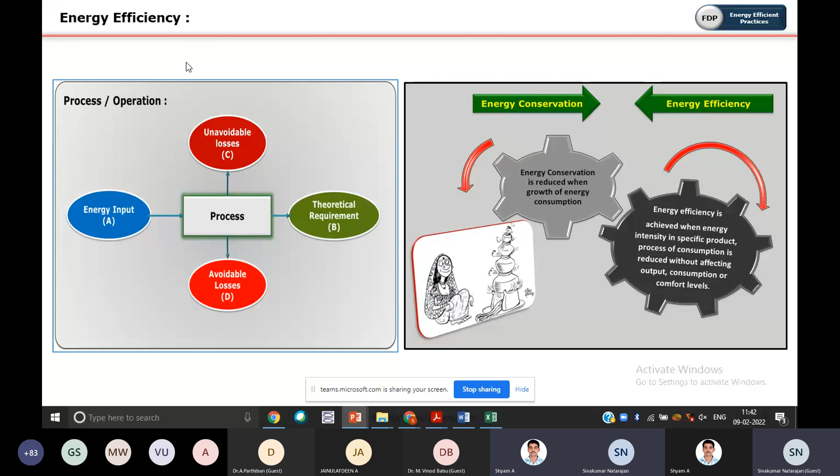So that is called energy efficiency. I hope we can move on to the next. And also one more thing, these compressors. I hope you are aware of the basics about the compressors, but I'm not going into details on the basics. Without knowing the basics of the components, not only compressors, I think you are going through many useful, productive sessions these 2 days.

Any basic components of any machineries, equipment, system, process or assembly line. Without knowing the component, you cannot measure. If you cannot measure, you cannot save the energy. So energy efficiency is possible only if you know the requirement of the process. What is the outcome of the process? The product metrics of the process, the characteristics of the process.

Okay, when we come to air compressors, broadly they're divided into dynamic type and positive displacement type. And the applications we use compressors for: plant air applications, clean air, cleaning applications, dry air, instrumentation, breathing in medicals, and process. Many process industries are using air applications. So for all these types of applications, which compressor we need to choose? That is the major critical one. That is a significant part of energy efficiency and energy efficient operation.

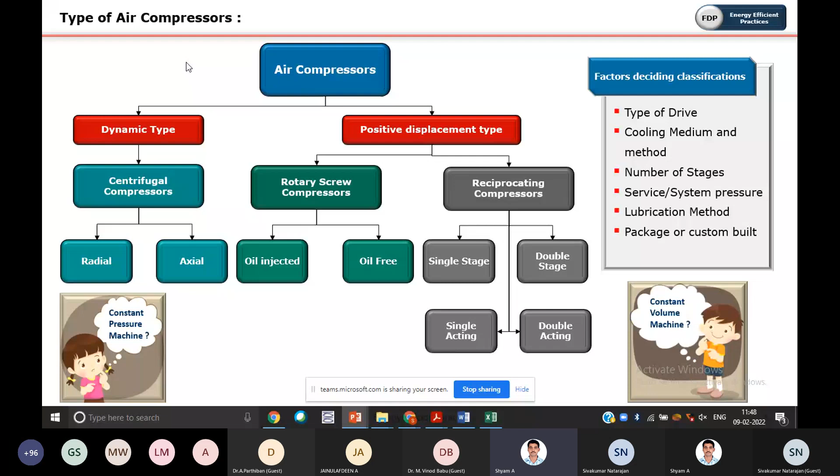In a compressed air system, there are two parts: one is the supply side and another is the demand side. We should not look only into the compressor side, because compressor is a main part, but that is not the only deciding factor for the energy efficient operation of a compressed air system. Compressor is just one element in the compressed air system.

Apart from this, on the supply side we have the compressor, filters, dryers, and receivers. On the demand side, that means in the assembly line, machine shop, substation, power station, or process equipment side, there are also some components.

Now, the important parameters in air quality. Why do we give so much importance to compressed air? Many people think compressed air is free because compressors are always kept aside in industries like power houses. So why do we need energy efficient compressors?

The important parameters in air quality are: the dew point, moisture should not be there, and oil content should not be there. Temperature should be optimum or low, and the air should not contain particulate matter. For this, there are some filters, even a pre-filter on the suction side, which is a very important part but often neglected. Many people neglect that area.

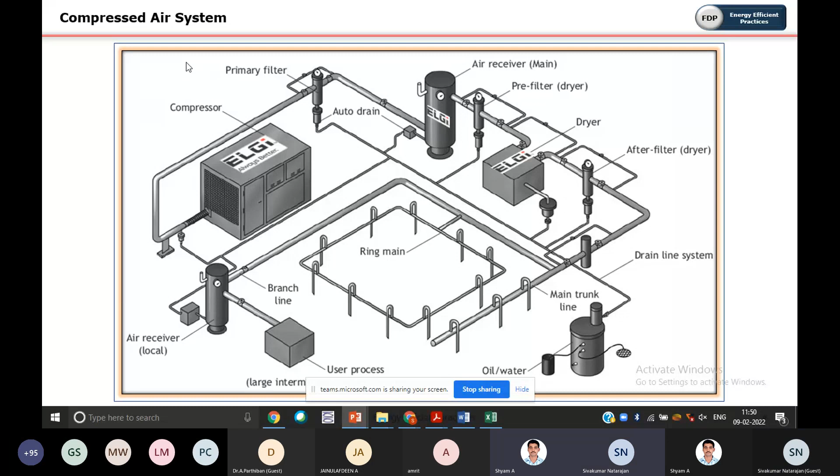This primary filter, pre-filter, and after-filter are all part of the supply side. Coming to the supply side: there is a compressor, then a moisture separator, a vertical or horizontal receiver, particulate filter, dryer, fine filter, and carbon filter. So we will get pure air.

The moisture separator separates the liquid water and oil from the air stream that needs to be removed. For this, the moisture separator is used.

Sometimes we know that water vapor cannot be filtered out of air; water in a vapor state can only be removed by a dryer. If it is liquid, then it can be removed by the moisture separator. So we need to understand water vapor cannot be removed by the moisture separator, but water in liquid form can be removed by it.

Coming to the receiver part, the receiver is always an important factor because it needs to comply with ASME standards, the American Society of Mechanical Engineers, which has given standards for pressure vessels like air receivers. There are two receiver types.

One is the wet type, because we connect it before the dryer, called the wet receiver, and after the dryer if we connect the receiver, that is called the dry receiver. This is used for intermittent load applications.

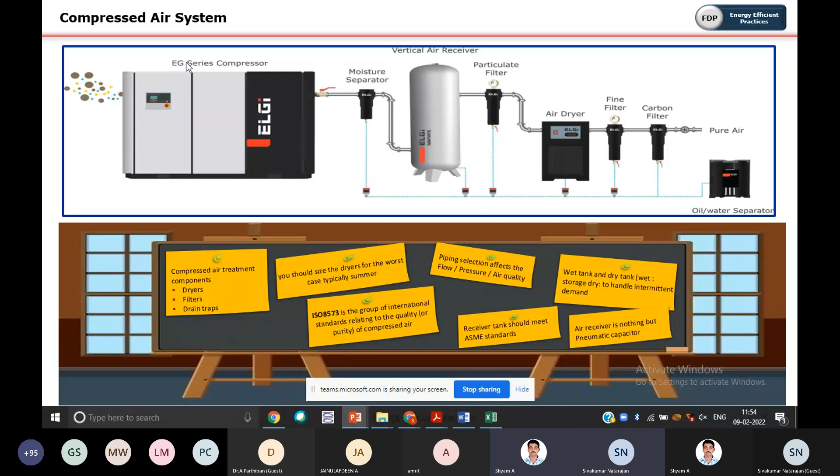So coming back to selection of compressors. We need to select the compressors before energy efficiency, because it starts from the selection of compressor, each and every component selection. Energy efficiency will not be addressed at the end of the commissioning. It will start from the planning part, right?

Also, which type of compressor - dynamic type or positive displacement type, reciprocating, rotary, or centrifugal - we've already discussed this. Beyond 12,000, from a high demand area, we don't have any other option, so we go for centrifugal. Only that will be efficient for effective operation of the plant as well as for efficiency.

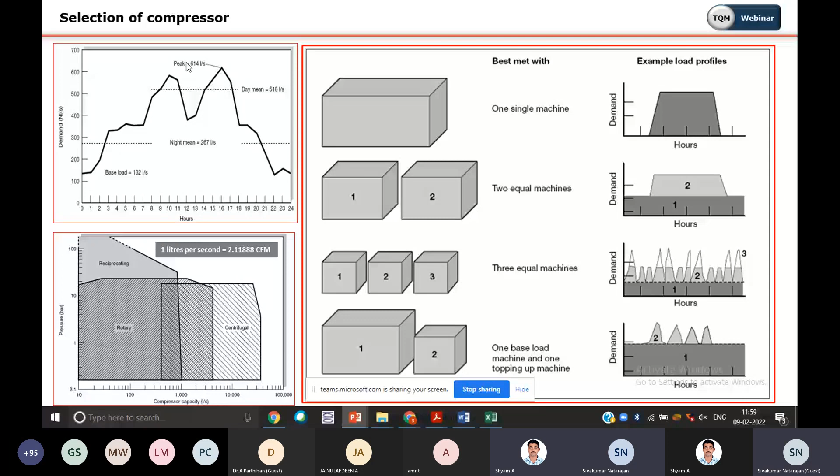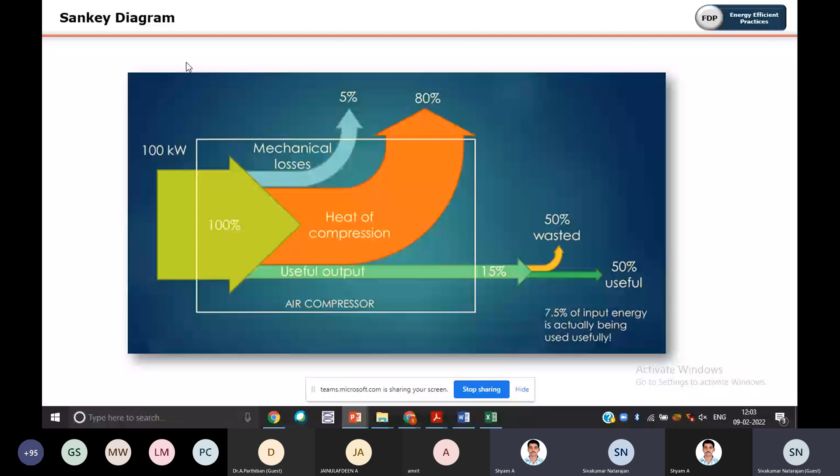Coming to life cycle cost, we need to consider the life cycle cost of equipment and machineries. Normally compressors are the costliest asset in any organization. The energy cost is hidden because every month the EB bill goes to finance, and compressor energy is one element of that cost. It will remain hidden if not addressed properly. The initial cost is only 10%, while energy cost and maintenance cost combined make up 90%.

So we need to address both. If you do proper maintenance, energy efficiency will also improve. In maintenance cost, it's inevitable that we spend on consumables - we definitely need to do that. Unless we spend properly on maintenance, energy cost will be higher and we will not achieve energy efficiency. Maintenance cost is a must, but with good maintenance practices we can avoid downtime, unforeseen failures, and major breakdowns.

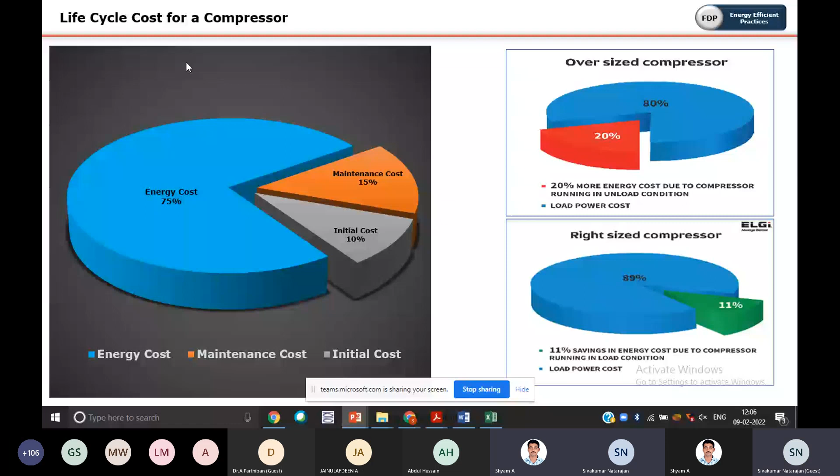Okay, we want to achieve energy efficient compressors and also an efficient compressed air system. If we address only the compressor elements and the compressor, that will not solve our purpose. The demand side is what we need to address. That is very, very important, because we get only 50% of compressed air for manufacturing. Another 50% goes to waste, ineffective.

Air leakage is the most neglected part in industries, in plants. When you are walking through the plant, do you observe air leakages? Even if you observe them, what will you do? Sometimes that air sound becomes familiar. We get familiar with air sounds. Only if the sound is huge, enormous, do we go there for safety purposes and see what is to be done. Otherwise, small air leakages go unnoticed, no man's land.

That needs to be addressed in a proper way, because these are no cost, low hanging fruit opportunities. You simply do some corrections: cleaning, lubrication, inspection, and tightening. That's all. And FRLs, once you fit them, once you commission them, no one bothers sometimes. But you also have to do air leakage management. You see, a minimum of 25% is there. In some industries, some plants, even more than that.

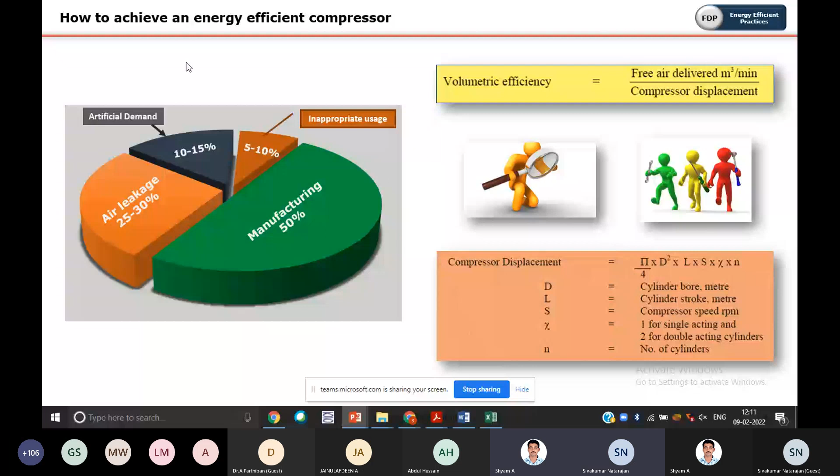Okay, we have opportunities. How to address energy efficiency, right? Before knowing the energy efficiency opportunities, we would like to know what efficiency in the compressor is. These efficiencies are termed isothermal efficiency and many other terms. One of them is volumetric efficiency. Volumetric efficiency is the ratio between free air delivered and compressor displacement.

Here you can see compressor displacement, and we will see free air delivered. What is that? It is nothing but the discharge air we get at the end of the compressor before it goes to the shop floor. For compressor displacement, you can see the formula π D² / 4 × L × S × χ × n, right?

There you can see directly compressor speed, yes. Others we can't do in a regular way by doing energy efficient operations. So the only thing is compressor speed. By varying the compressor speed, you can vary the volume. So this we can do. By varying the volume, you can save the energy. But many other options are available, so we can see them one by one.

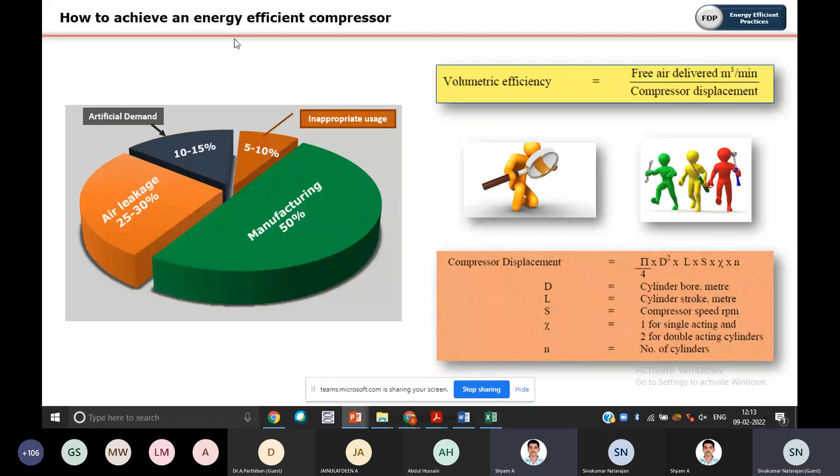In the free air delivery, that is the inlet condition, because the free air delivery is measured in the inlet condition. What is inlet condition? You are sucking the air from the atmosphere, then you process the air inside the compressor and you are delivering the air again back to the atmosphere. That is called inlet condition. In the inlet condition, we are measuring the free air delivered, that is the volume. But this we cannot measure in our plant and other operations. So we can measure the plant by some other method that we can see later.

This is being measured by the manufacturers themselves. They will use some nozzle type method to measure it. This is the compressor capacity. What is CFM? What is the cubic metre per minute? This is the specification of the compressors which we are getting from the OEM or manufacturers.

Okay, what is the approach to have an energy efficient compressor? First, we need to select the right size. Already we have seen it. The second one, we need to manage the dynamic system. What is a dynamic system?

Dynamic, the name itself, means it keeps on changing, because there is an intermittent pressure drop, some demand is coming, volume is increasing and decreasing, productivity is increasing. We are supporting productivity, so based on their demand, we need to operate the compressors in a dynamic way. For that, we need to have some intelligence in a proper way. The road should be smooth; our compressed air, which travels to the machine shop or assembly line, should be smooth. And also evaluate the process.

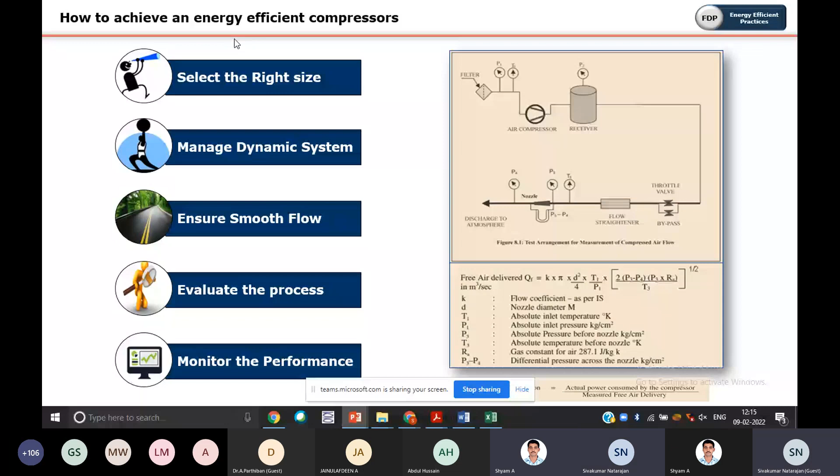So coming back to this, we will select the right size and achieve 20% energy savings immediately. Also, in the dynamic system, as we see the volumetric efficiency, we can vary the speed by putting a VFD or something, achieving the efficiency part. By using the VFD, it will be more efficient than other methods. There are many methods available, but the VFD is currently the most efficient way to do the dynamic system, because you can do some wonders by using VFD.

Not only for a starting purpose, the VFD can be connected with the pressure regulator. That feedback can be given to the VFD, so we can regulate the pressure. Based on the demand, it will regulate automatically. More precise VFDs are there, and this total set of arrangements will be very interesting if you go deeper.

And the smooth flow: on the supply side we have seen the pure air coming out from the dryer and after that some filters. It will be transferred to the shop floor for machine operation and tools requirement or medical, whatever. The piping is very, very important. Sometimes we forget about the pipeline system, pipeline distributions. Normally we tell the plumber, whether he is a subject matter expert or experienced, and we just depend on the plumber.

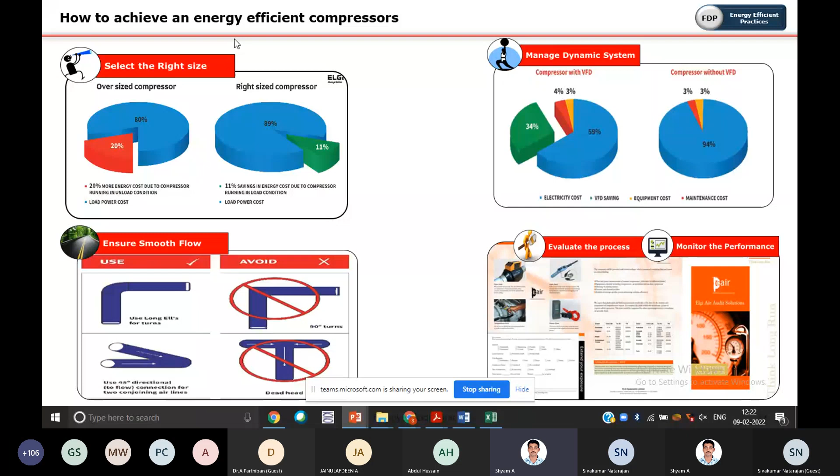As we saw earlier, energy efficiency starts from the compressor's installation. Have you seen the compressor's installation area in every plant? The machine shop or power plants are there, but the compressor area will be commissioned somewhere in the corner. After commissioning, no one will bother about it. Only maintenance people will go and come in that area. It's not a problem, but we need to be conscious of where we have installed it.

Is it a good environment? It should be dirt-free, dust-free, with enough space, because maintainability is a very important thing, and also fresh air needs to be circulated in that area for proper ventilation and airflow. Then only the temperature, cold air, because air intake is the first point. That is the first step of energy efficient operation. So in that area, you need to consider all those things.

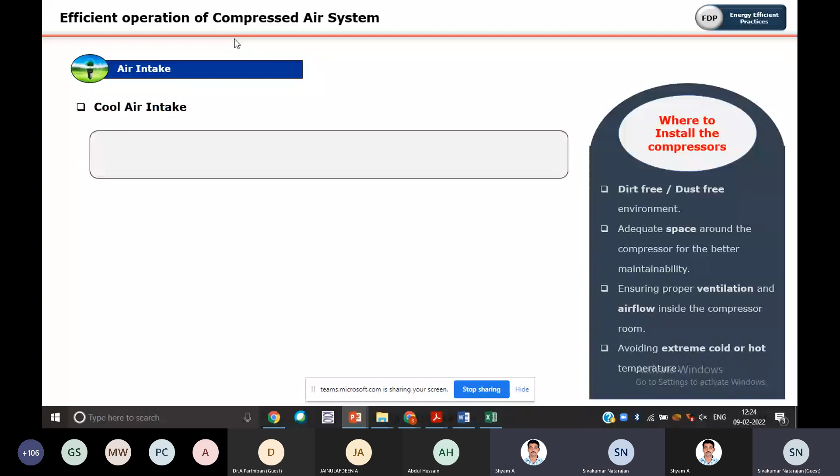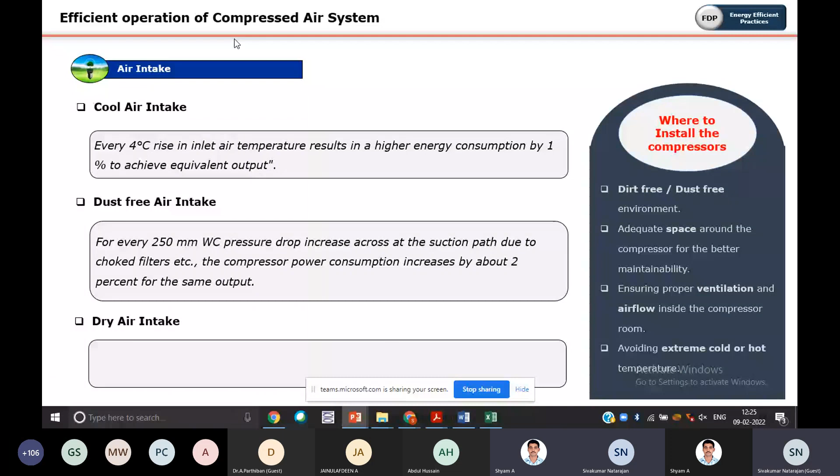So this air intake should be cool. Every 4-degree rise in inlet temperature costs you, because energy consumption will increase by 1%. And also dust-free, otherwise that will increase it by 2%, for every 250 mm WC pressure drop at the intake. And also dry air, the moisture should not be there. Those are the core areas that you need to concentrate on.

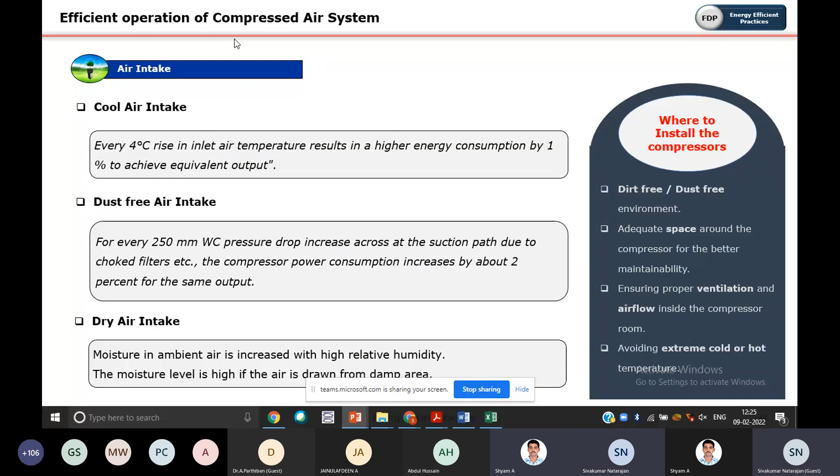Coming to this pipe distribution, after installing the compressors, you will take the air to the plant, the machine shop, assembly and the process areas. So the piping should be large enough because the pressure drop should not exceed 10%. And also the size of the pipe should be greater than the discharge valve you are providing. And also the pipe should be galvanized.

Many materials are being used, black iron, MS, PVC, copper, aluminum, stainless steel, many materials are being used for the pneumatic line. But nowadays, the most efficient way is aluminum, but the cost is very high. It depends on the application and the process, so we can use aluminum. Otherwise, we need more manpower or resources to do the maintenance activities if we install MS and GI pipes.

And also the slope should be maintained in every area. We need to divide it into many zones for pneumatic pipelines. So this pipeline should be sloped away from the compressor. Suppose every 100 meters you need to have some 1 meter slope. Otherwise, moisture condensate will stay on the pipeline. And also the drains. The drains you should install at every point.

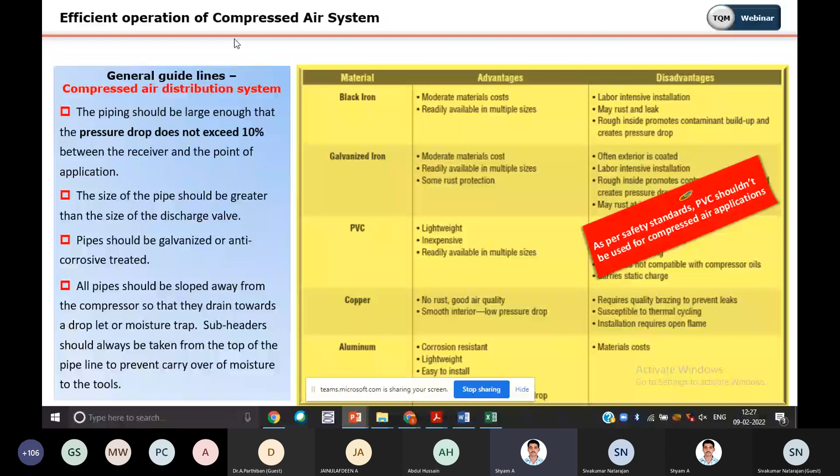Another part is the air receiver. In electrical terminology we can call the air receiver a capacitor, because it stores energy. It stores the amount of compressed air required to raise the system pressure. Sometimes there will be pressure drops at the far end of the plant. So it needs to be ready to lift the system pressure by 1 psi every time, because this needs to be accumulated. And also it has to supply the current demand as well.

The same receiver can be compared with the accumulator or booster in our hydraulic system, and the flywheel in transmission systems. When you see the air receiver pressure changes, a slope can be determined. You can see from the picture, a negative slope indicates that energy is released from the air receiver, that is, compressed air is released in order to raise the system pressure. A positive slope means energy is absorbed into the storage because it receives air from the compressor.

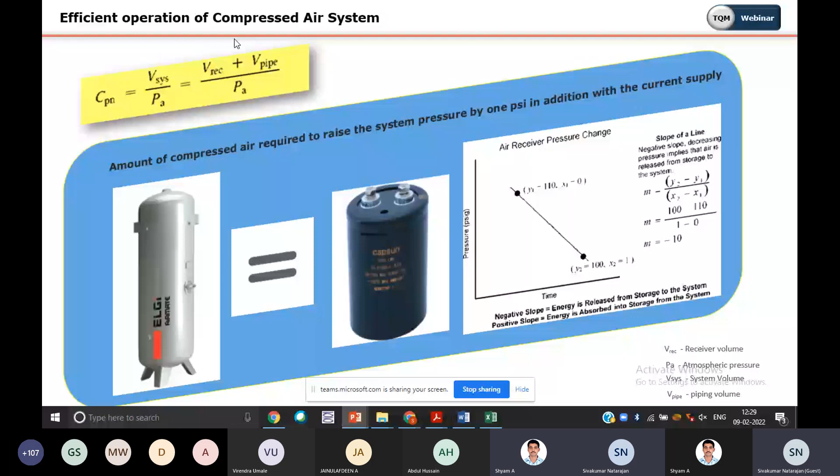And we have seen this from the formula: volumetric efficiency, speed control. Speed control sometimes we can do separately, and in some reciprocating compressors multi-step control or speed control is available in the compressor itself. So power consumption at various loads we can reduce. Even at 50% load and 25% load, you can benefit much from VFDs, throttle controls, pressure control. Speed control nowadays is achieved through VFD only. That is the most effective way.

Otherwise, you can do some internal retrofitting of air ends, because in the air ends two rotors are there. By retrofitting air ends, you can reduce the volume by resizing those components.

One important point we need to remember while lowering the speed using VFD or VSD: lubrication should not be affected. You should know what the base load is at very low speed. Base load CFM, that is volume, you need to fix it. Otherwise, if you reduce the speed very low, there will be a danger to the lubrication system as well. And inappropriate usage, we have already seen it.

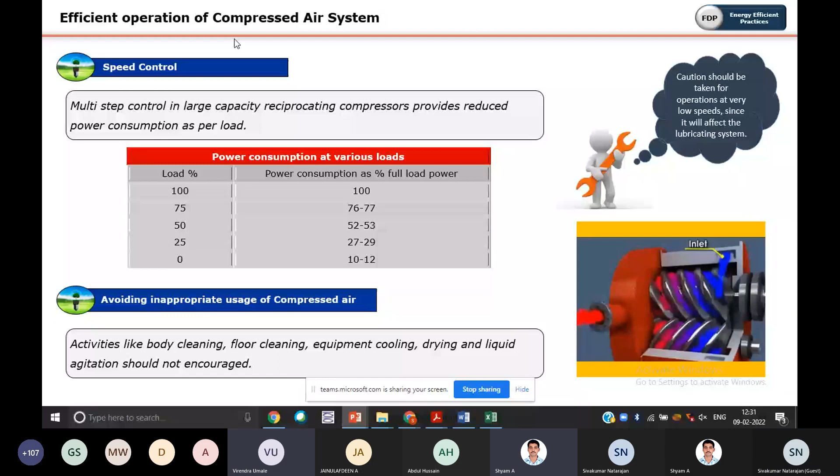So coming to air leakages. From the table you can see the orifice size 0.8 mm, kilowatt wasted 0.2, cost only 9,600 per year. Yeah, right. But the multiple of 0.8 will cost you more. Even 9,600 also is unwanted. So we need to take care of the air leakage management system.

So we need to establish the air leakage management continuously, because one time is not enough. Because many service points are there, many end use points are there. So there are leakages in the pipeline fittings, valves, and joints, even in the equipments and tools, FRLs. So all needs to be addressed. Suppose if you have plenty of FRLs, plenty of joints, you have to keep monitoring the air leakage percentages or air leakage management through some effective system.

Otherwise, if you do it randomly, or only when somebody asks or when some huge noise is there, that will not be effective. You need to vigorously, consciously do some systematic thing. So if you have an engineer, give him one managing point and performance indicator, a KPI. He needs to do the air leakage audit. This much air leakage needs to be arrested per month or per week or every day. He needs to report like that.

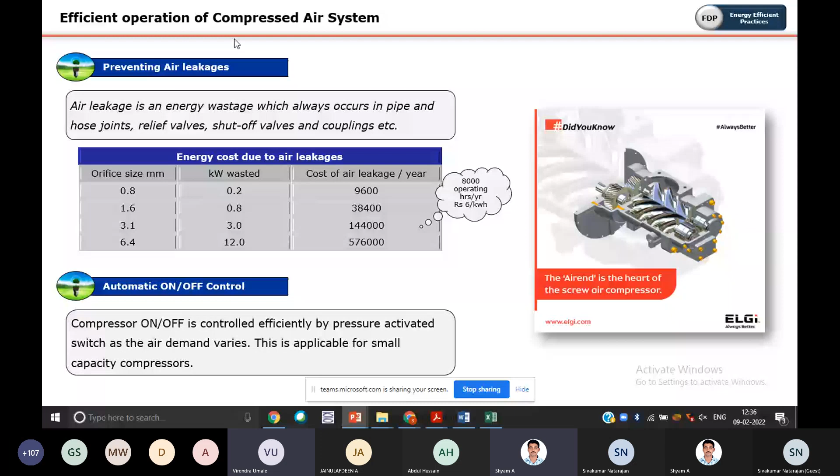So next coming to the air leakage test part. This air leakage test we can do even without knowing much about compressed air. Anyone can do some Excel sheet and do the air leakage test as well.

Actually, how do we conduct the air leakage test? It's very easy, but this needs to be done in the holiday only. In the power plant, it's very difficult, and in continuous process industries somewhat difficult. Somehow we need to do it in the shutdown time or zone wise. We can separate the zone and do some exercise on this, so zone wise also we can do some air leakage test.

But the effective way is to shut down all the machineries, equipments, tools, wherever the compressor is connected, service points, as it is, and do the repeatable test for 8 to 10 times. Minimum 5 to 6 times is required, or for better accuracy, you can do 8 to 10 times, one cycle.

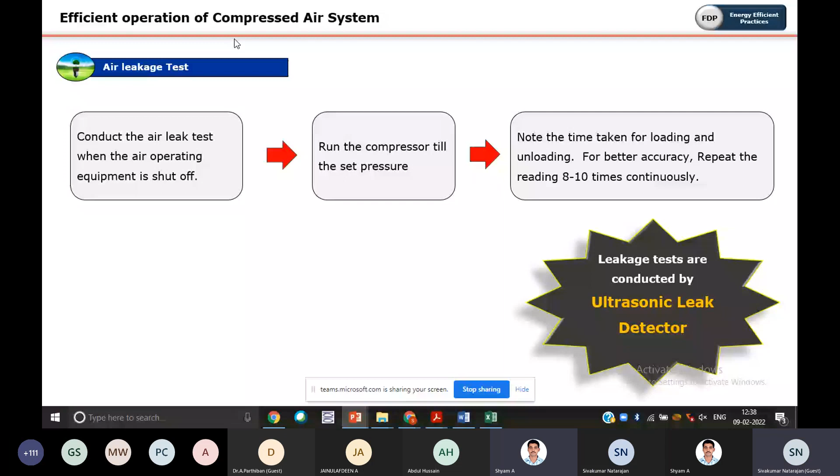If you do that, you can have one formula: the total loading time you measure, and then the unloading time you have to measure. So based on this formula, load time divided by total load and unload time, multiplied by 100, you get the percentage of leakages. Also, if you multiply this with the volume, you can get what is the leakage quantity in the plant.

Normally the industry benchmark is 15%, less than 15%. But that is also not fair, not good, not advisable. If you are less than 10%, that will be very good and excellent. So if you address more and more, because for that, an air leakage management system should be effective and robust. If you address air leakage management more and more, you will find more opportunities, and also you may implement more automation, so your hectic work will completely disappear.

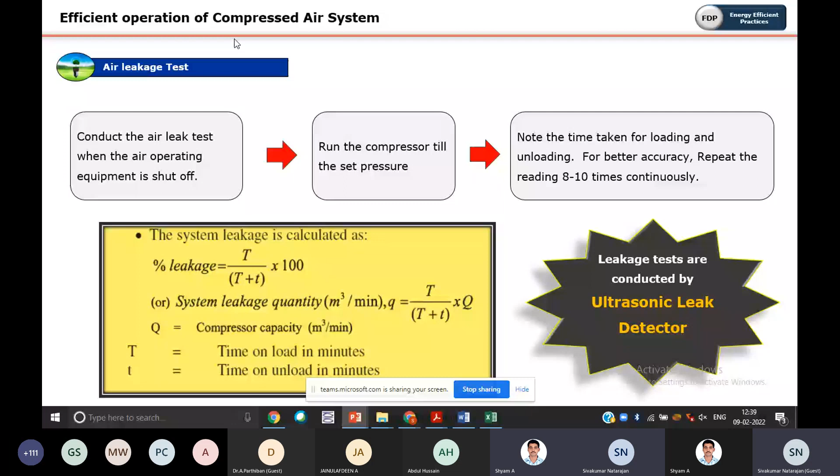Based on this, you can find from this leakage what is the volume wasted per day and what is the specific power consumption of the compressor. That also you can find from this leakage test. You need to schedule this leakage test, and it can be applied effectively.

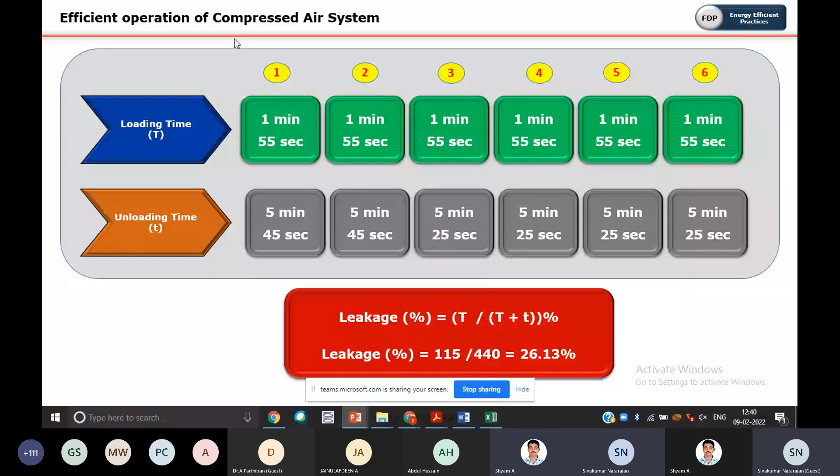If you provide a drain, who will be draining the pipe? That is one problem. Suppose in the main air receiver, if you have a drain pipe, some person will go daily and drain it. But in a very big plant, suppose hundreds of drain lines are there, so who will go and do that? Also, these areas will be unattended.

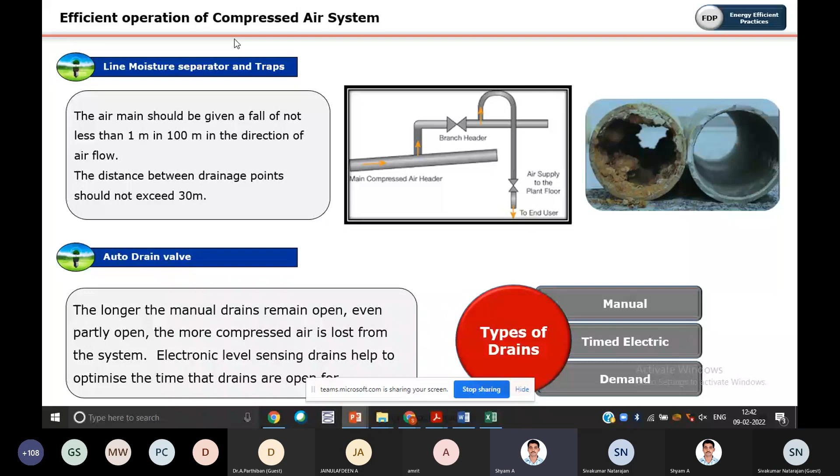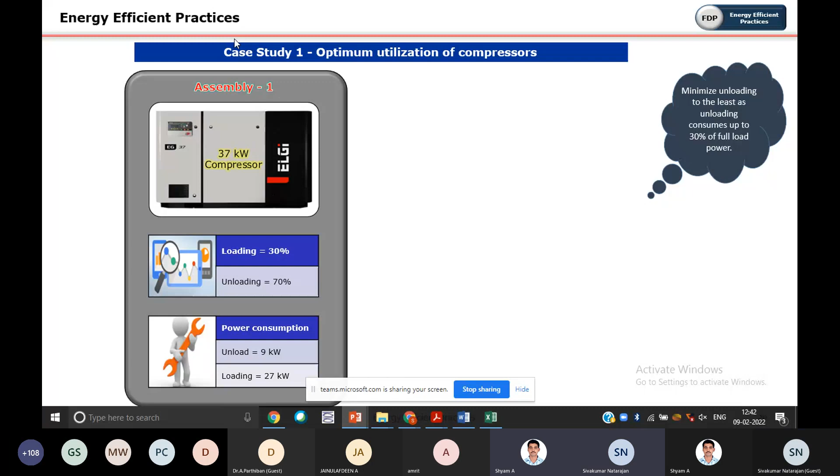Coming back to this case study, I'm getting this published only; this is for illustration only. It's not exactly this type of compressors and other things. This is about optimum utilization, because unloading time we need to minimize. So that is the first part.

Actually, if you are having a 37 kilowatt compressor, so unloading is 70%. The requirement is some CFM. So if the unloading percentage is very high, more than 70%, you can have another 15 kilowatt compressor. Whenever the demand is high, you can use the 37 kilowatt; whenever the demand is low, you can use the 15 kilowatt.

Or you can resize both the compressors, so that if the demand is high, you can run both compressors; if the demand is low, only one compressor. That kind of thing you can do. The payback is almost 12 to 18 months; within 12 to 18 months you can get it by proper calculation.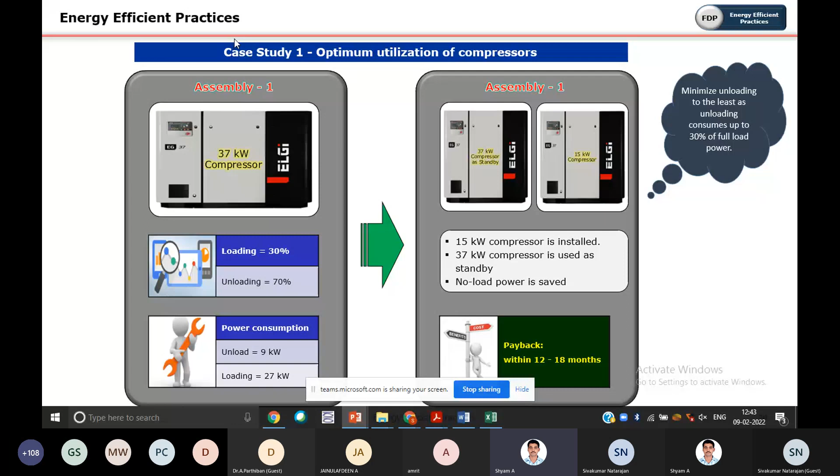In a textile industry, during yarn breakage time, only 600 CFM is required, but for the remaining time only 100 CFM is needed. So they oversized the compressors and installed 600 CFM compressors. But actually a 125 CFM compressor is enough, and only when 600 CFM is required, you can use pressure-controlled arrangements like VFDs to meet that peak demand.

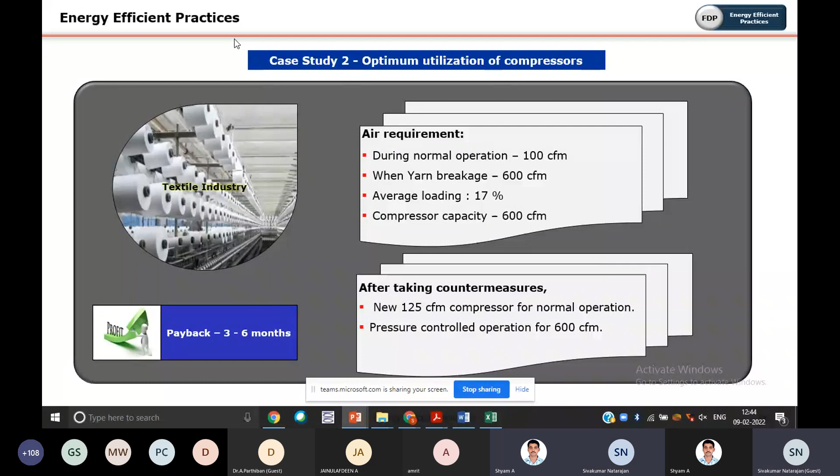This is another case implemented in many industries. There are two machine shops, each with a separate receiver, and two compressors. You can interlink both receivers to increase the volume so that you can meet the demand. Based on the demand, the compressors will operate - you can run a single compressor keeping one as standby, or operate both. With continuous study of the loading pattern, you can plan investment accordingly.

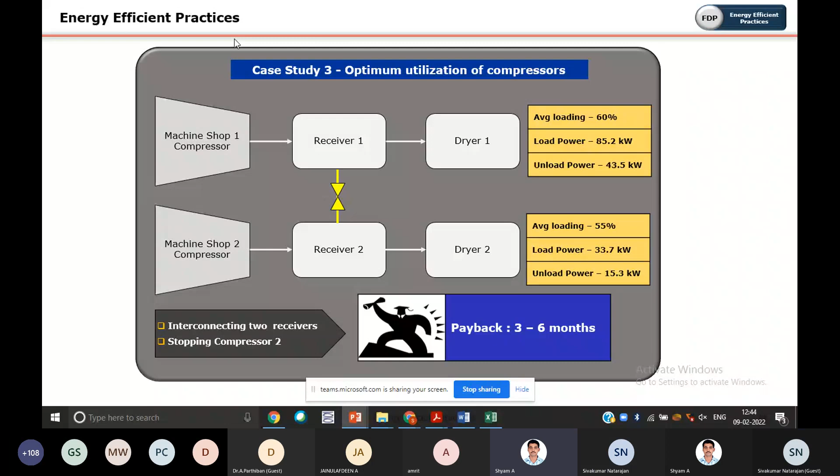This is a paper mill waste heat recovery case. We saw in the Sankey diagram that 72% of heat is dissipated in the oil cooler. So the waste heat recovery unit is installed between the compressor and the after cooler, before the dryer. This recovered heat can be utilized for preheating feed water in boiler operations, and also for hot water required in some processes at around 80 degrees, since 60 degree air temperature and 80 degree oil temperature come out from the compressor. This is a very effective method and saves much energy.

For example, in this paper mill, the heat recovered is 89.14 kWh, and almost 2,000 liters of continuous water supply passes through this waste heat recovery system, getting heated and being used for their processes.

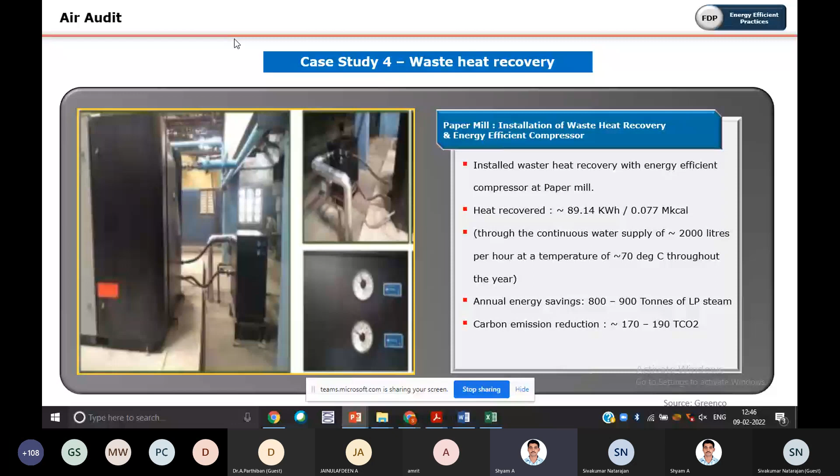Another case study relates to VFD. If you see the diagram, there is a base load of 497 CFM for one compressor, constant volume, and another 100 HP compressor also gives 497. So if we operate two compressors at constant volume, 994 CFM can be met. But suppose demand is below 497, or above 994, or between 497 and 994 - we need to think differently since we cannot use constant volume compressors for that.

For that, we need to find the control gap. This control gap exists everywhere - if you analyze the demand pattern, the control gap is there. By analyzing this control gap, you can install a 150 HP variable frequency drive so that the maximum flow is 735 CFM and the minimum flow is 150 CFM, which is the volume obtained at low speed of the compressor using the VFD. This allows you to vary and regulate the pressure within this control range.

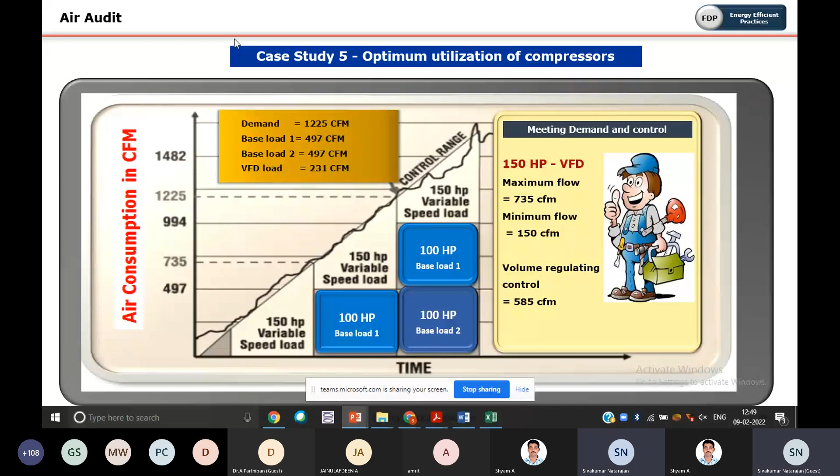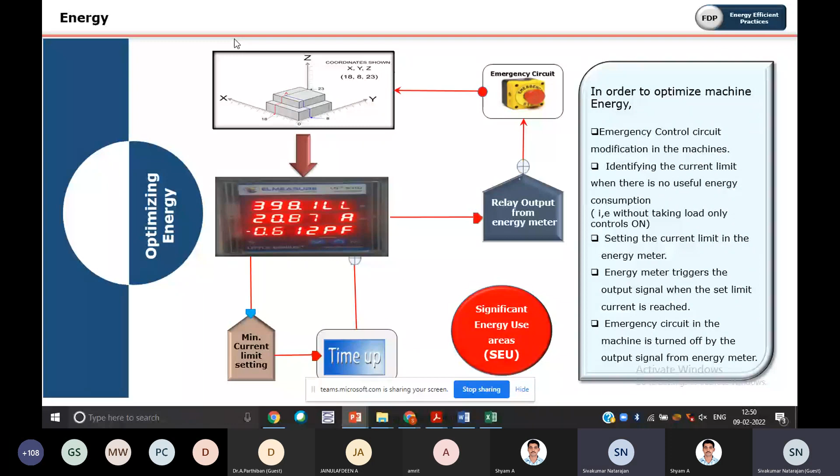This one is for illustration. Just want you to understand how energy can be optimized. This logic can be done for any machines, any equipment, and any assembly line wherever it's applicable. So suppose an equipment or the compressor utility.

An energy meter is fixed in the compressor or this particular machine. Nowadays energy meters come with relay output and triggering relays. This is one type of energy meter which has potential free contacts and will trigger relay outputs. So if we set the minimum current setting or maximum current setting, we can have control on the equipment.

Suppose, for example, one machine with 100 kilowatt capacity. In machining operations, it needs to switch on continuously, and during that operation it will take high current, but during idle times, meaning no operation, no machining, there will be low energy use. At that time we can sense this using the energy meter, and we can set the no-load current, meaning the current during non-machining or non-operation time of the equipment or assembly. So we can have a setting on that.

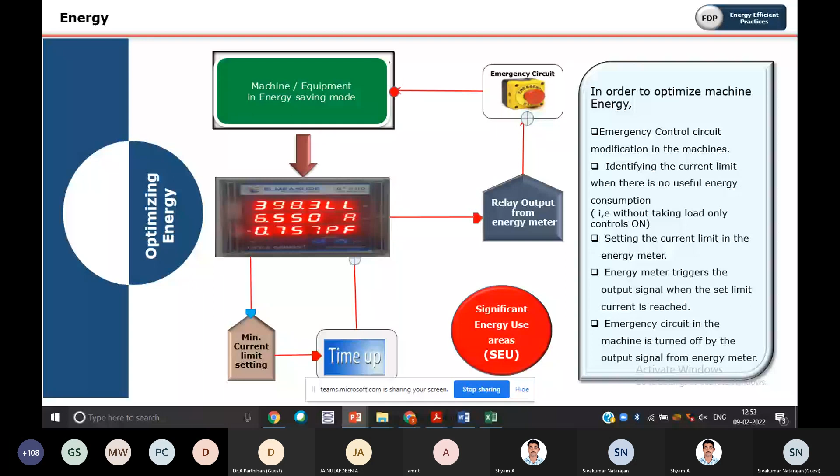This is a very old practice I've seen at a gear manufacturing company in Rajasthan. On their assembly line, many pneumatic tools are used, and sometimes pressure drop is inevitable in that area. Different pneumatic tools have different CFM and process requirements. So in that area, they stabilized things with a pressure regulator, sorry, a booster, both a pressure regulator and an air booster. This helps in that particular line or zone to enhance the pressure, so the initial compressor pressure doesn't need to be regulated to the maximum.

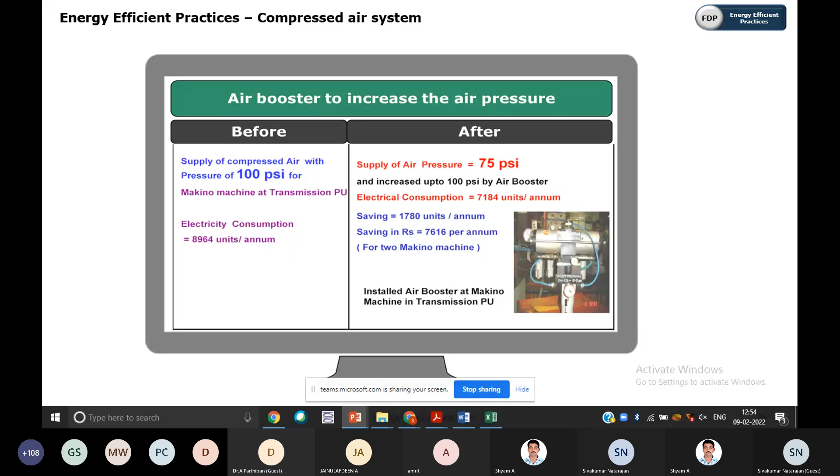Power factor is also one of the factors deciding energy efficiency, and the earthing system. Double earthing is compulsory, and the earthing should be effective - this is also a compliance requirement. Based on requirement, you need to schedule earth pit or earthing point calibrations.

This is also a compliance part, and also motor performance - you need to continuously monitor full load current, rated speed, and no-load current. So in addition to preventive maintenance, you can do continuous monitoring as well. Nowadays the systems and technologies are coming along very well. Vibration level is also more important for preventing breakdowns, among other factors. We have discussed air leakages more already.

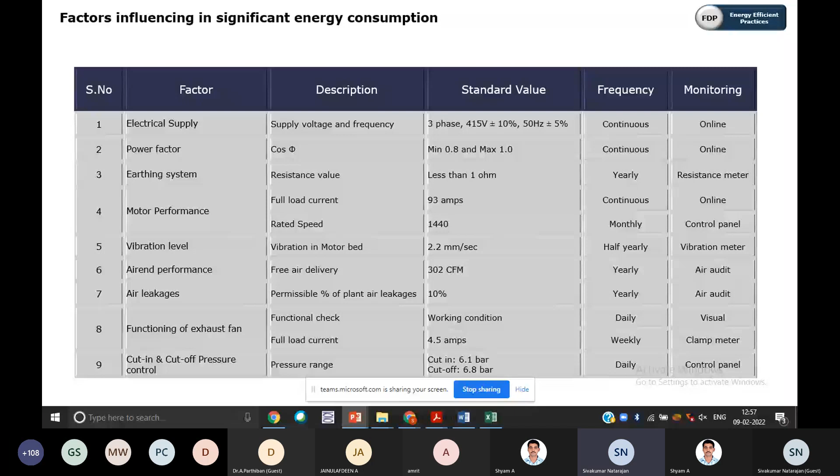That's what we think. Suppose in our room or house, the light is not sufficient, so we simply replace the tube light with 30 watts, 22 watts, like that. We simply replace the light, but we need to do one thing. We need to just clean the surface of the tube light. Then you will get more illumination. Without doing that, we are simply taking some decisions. So that is more important.

And right dryer, VFD, and misuse of air. This already we have seen, and also air audit. Air audit definitely, as a power plant and any manufacturing industry, you need to do regularly. Air audit is also part of energy audit. Suppose you can't afford the whole energy audit at that frequency, you need to do air audit regularly. So that is a very, very good practice.

And apart from this, good maintenance practices will also keep us in the forefront of energy efficiency, because we do reactive maintenance. There is breakdown maintenance that will help availability of the machine, but that is a very old-fashioned, conventional method. Nowadays, apart from preventive and planned maintenance, predictive maintenance is coming up. It is already implemented in some areas, and some research is going on to develop algorithms for predictive maintenance. So now management systems and dashboards are available.

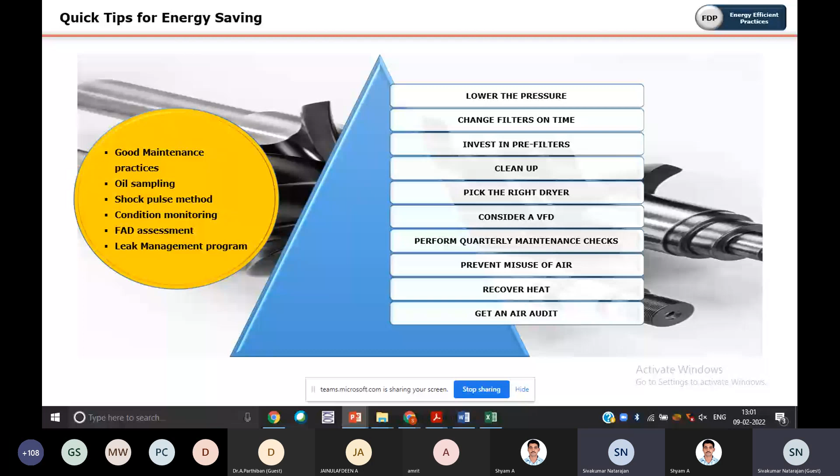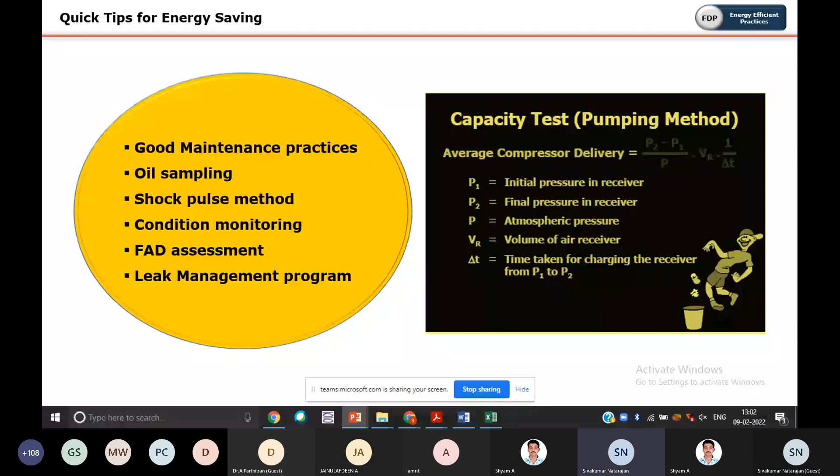P2 minus P1 by P into volume of air receiver by delta T, the time taken for charging the receiver, because it is the time taken for filling the air in the receiver. So P2 is the final pressure, because that is the pressure you are achieving from the time when you start the compressors. So these are some more points for an effective, energy efficient compressor system.

The air audit process, I'll just go through quickly because this is a very big subject, and more importance has to be given to the air audit process, because you need the monitoring of the plant utilities, and also you have to measure the flow requirement for each zone or the entire factory or entire plant or equipment-wise. If you have plenty of data available with you, you can interpret easily. The data matters, so if you do the air audit consciously, it will be good.

And after the air audit, opportunities will be identified. Those opportunities can be analyzed with the resources and requirements. Then the recommendation can be done. So actually, using the air audit, you can save the wastages. Many case studies you can see online.

So first they had ordered one compressor for so much kilowatt. Then they realized that this is very oversized. After conducting the air audit, they got back, because even after releasing the purchase order, they shifted their compressors to some other plant. So that kind of potential is there in the air audit. We should not miss out the air audit in our plant.

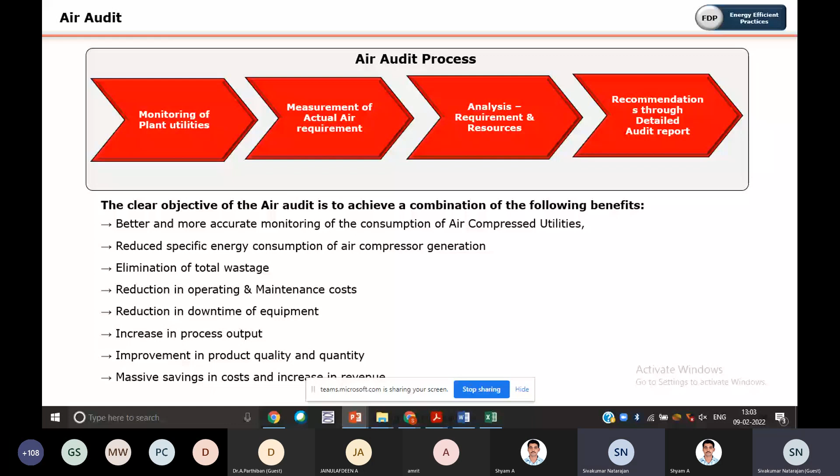So there is another one, the supply and demand, because what we are expecting from the compressed air system, what we are generating, needs to be kept in the machine shop, assembly line, the end user. So that is the process. So some dew point analysis, volume flow meter installing, we can measure daily, and we can make a reading and recording daily. And also the leak detection, piping schematic. The piping schematic you can do with some experts. That is a very important thing, but it is a neglected part in many industries.

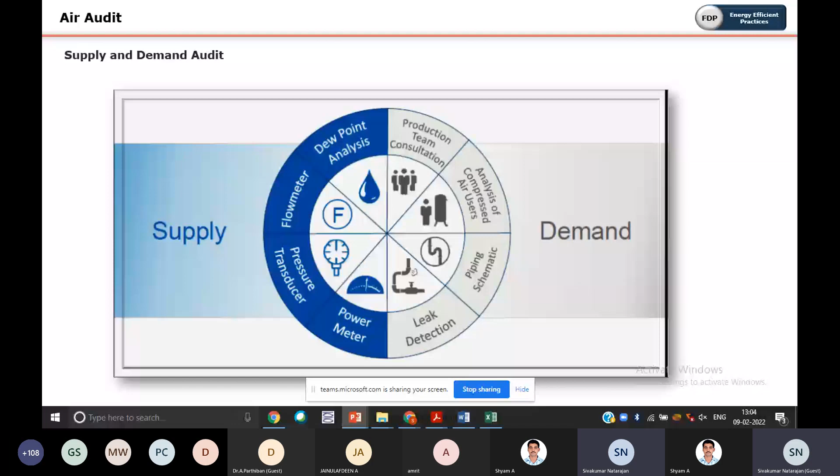And also instruments. So what are the instruments? Instruments are also a very major part, a key role in deciding, because if you use effective and more accurate instruments, they will give you more data and very accurate data, so that you can analyze, interpret, and predict the possibilities, opportunities, and the failures. So if you don't have the proper instruments, that will be problematic.

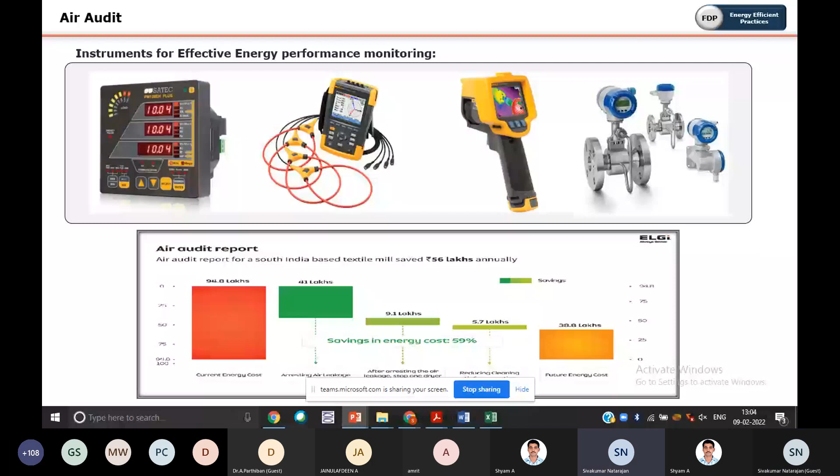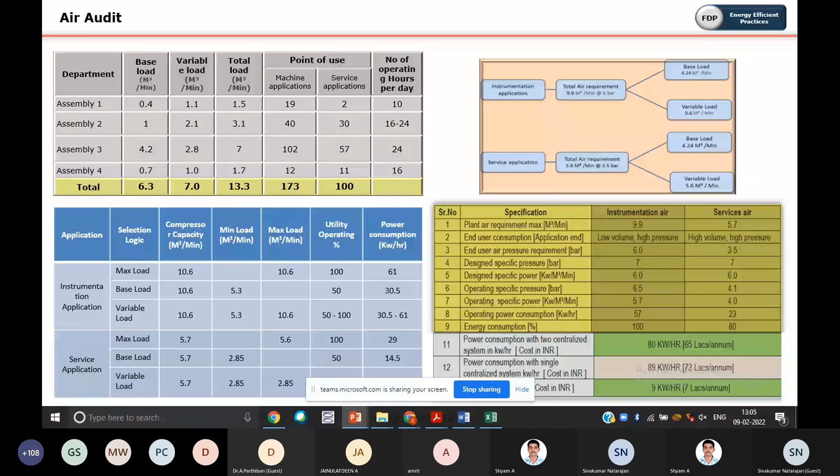And coming back to this approach, actually, while thinking about energy efficient operation, not only in the compressed air system, we need to think of the basic components of that particular machine or equipment or system or assembly for which we need to do some correction in the energy efficiency. And also the theoretical part, we should know some basic formulas. We don't go in detail, because by doing these things only you will drag the time. Be practical on the energy efficiency part. Being practical means you need to apply.

So if you are in the theoretical part, doing the calculations again only will not help. So you have to make some action plan. What is to be done, how it is to be done, what are the risks and what is the mitigation for that. So for that, this is the approach for doing any activity. Even in your personal life, this principle can be adopted.

Plan, do, check, act: the PDCA cycle. That is the most popular approach for any problem solving and also task achieving. So for that, you have to plan the resources and also the energy data, and what are the aspects in the particular equipment. So energy aspects also you have to consider; you have to analyze each and every one.

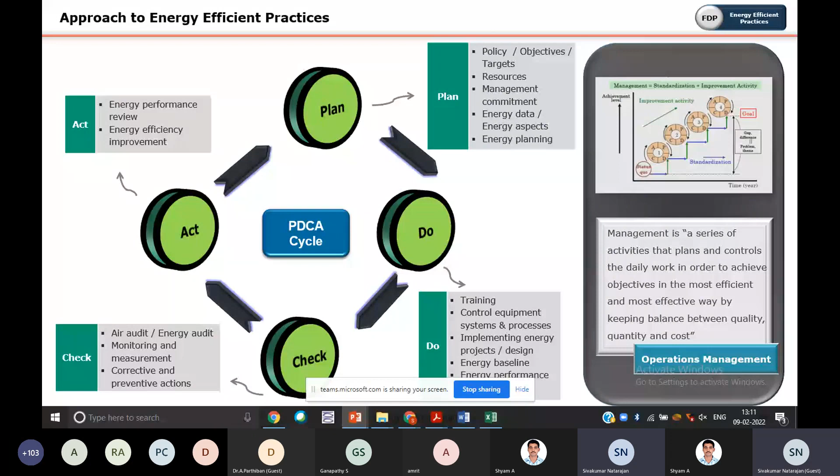So without data, you are just another person with an opinion. Actually, data is more important nowadays. We believe in God for something, but in engineering, major decisions are being made using the data. And also in future, data analytics and data science will be one of the subjects in every area that people will learn and study. It's a major area because artificial intelligence is coming out in an effective way. So the data is more important.

The data manipulation, the data algorithms, these will all play a critical role in energy management, and not only energy management, but process automation and everything. So Industry 4.0 is the new era nowadays. So we need to move on to Internet of Things, IoT-based energy efficient operation or IoT-based operation.

While selecting the compressor components, we need to be very careful whether there is a communication device inside, say, the dryer or compressor. In the compressor itself, the manufacturers are giving IoT type. Whether there is compatibility for connecting with our own IoT, whether future expansion is possible, any changes in the software, module or algorithm and the connection part, these are to be evaluated before investing in any compressed air components.

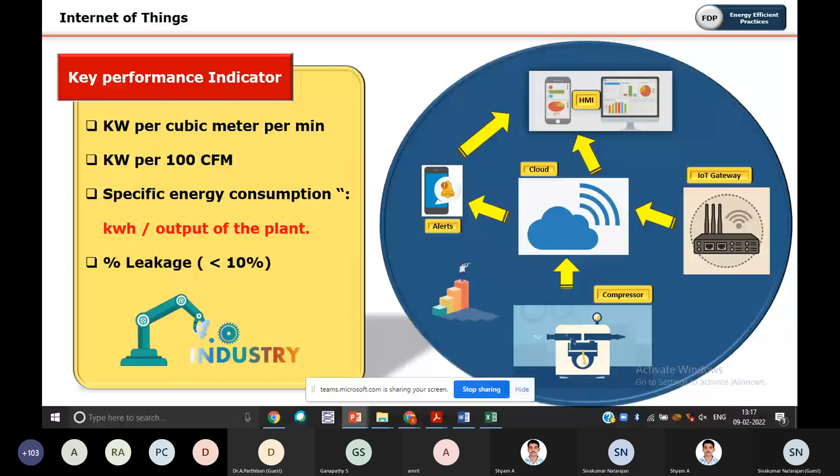Okay, coming back to our routine life, sustainability is more important, because nowadays sustainable development goals are being initiated through the United Nations. They have set a target for each country, because many people are not aware of this, but this is our planet. So we need to contribute as an individual, as an organization, as a group together. So in this part, if we save 1 unit of energy, I think people in a thermal power station or power generation teams know very well about that.

For a household person to get 1 kilowatt hour of electricity, you need to generate almost 4 to 5 units of energy. For that, you have to burn fossil fuel. So you know very well. It is a big subject. I cannot go into this, but we have to do something for the planet in this way. Not only in the energy efficient way, we need to always keep conscious of the environment as well while thinking about energy. So that's all from my presentation.

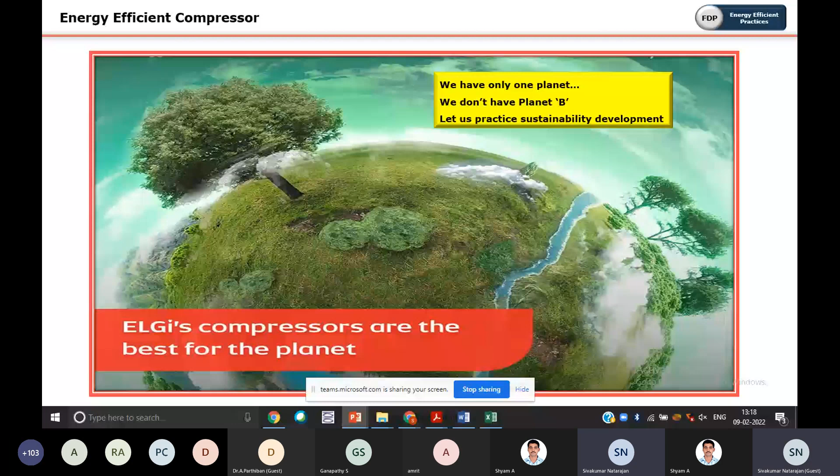I just wanted to complete on time. That's why I just went through it. There is a lot to share of my knowledge and experience. I hope you will get more insight on energy efficient operation in compressed air systems. I'm very passionate about sharing my knowledge and experience in various topics like TPM, TKM, electrical safety, maintenance management, QC stories, and the area of engineering science in power systems as well.